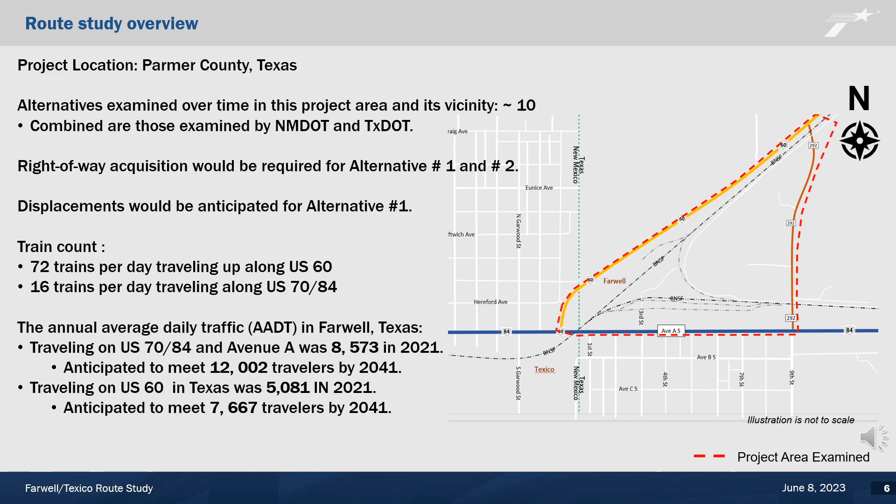Presented on this slide are the purpose and need. The need for alternative number 1 and number 2 includes improving safety of travelers on US 60, 70, 84 in Parmer County, Texas, reducing potential for vehicle versus train incidents at the existing railroad crossings, providing ADA ramps and sidewalk facilities to meet pedestrian traffic needs along US 60, 70, 84, providing wider shoulders on FM 292 for farming equipment traveling between properties, providing enhanced traffic routes to increase mobility for emergency vehicles and first responders, and providing the traveling public with enhanced traffic routes during train delays at the existing crossings.

The purpose of the route study is to identify route options that would reduce or eliminate travel delays at the existing railroad crossings in Parmer County, Texas.

Identify if a route presented should be advanced for further design and environmental study, engage stakeholders and the general public to gain feedback and input, and assess the impacts either alternative would have on the communities of Farwell, Texas, and Texico, New Mexico. The purpose of the public meeting is to inform the public of the status of the route study.

To present proposed alternatives and determine the potential to affect lives and property, to develop a record of public views and opinions to accompany recommendations for a feasible traffic route to span one of the existing crossings in Parmer County, Texas.

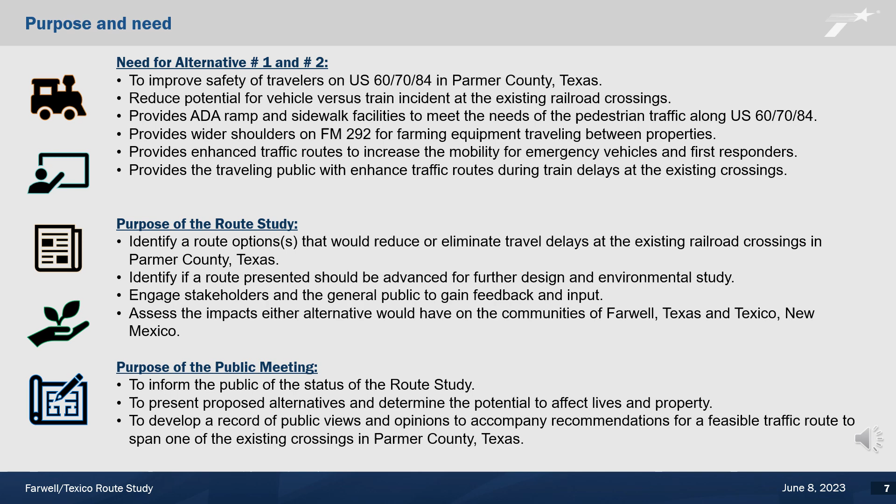Let's review alternative number 1, referred to as the US 60, 70, 84 Railroad Bridge. This alternative design would require construction in both Texas and New Mexico.

In this slide, the schematic for alternative number 1 is being displayed. Alternative number 1, referred to as the US 60, 70, 84 Railroad Bridge, would span from FM 292 in Farwell, Texas to College Street in Texico, New Mexico. Depicted in red is the proposed frontage roads. In blue are the proposed main lanes, and in yellow is the bridge structure spanning the existing BNSF railroad.

Construction would require right-of-way acquisition and displacements on the north side of US 70, 84, also known as Avenue A, within Farwell, Texas. It would also require right-of-way acquisition and displacements on the south side of US 60, 70, 84, also known as Wheeler Avenue, within Texico, New Mexico.

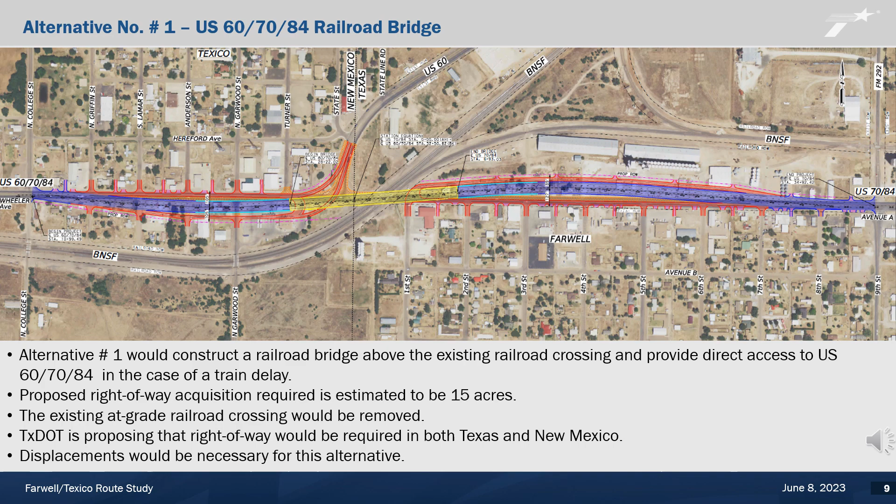The proposal of alternative number 1 is to construct a grade-separated bridge above the existing railroad crossing and provide direct access to US 60, 70, 84 in the case of a train delay. Proposed right-of-way required is estimated to be approximately 15 acres. The construction of the bridge would mean that the existing railroad crossing will be removed, and no access will be available across state lines below the bridge.

Shown here in the illustration is the proposed typical section of the US 60, 70, 84 railroad bridge. A typical section is a cross-section of the road designed to provide the public with a visual representation of how it may look. The illustration is not to scale and is simply for visual representation.

The illustration on your screen shows the proposed bridge structure in the air spanning over the existing BNSF railroad. At its crest, the bridge height will be approximately 23 feet. The bridge structure will be composed of 2 travel lanes in each direction with a width of 12 feet each, divided by a central barrier, with the design also including 10-foot wide outside shoulders.

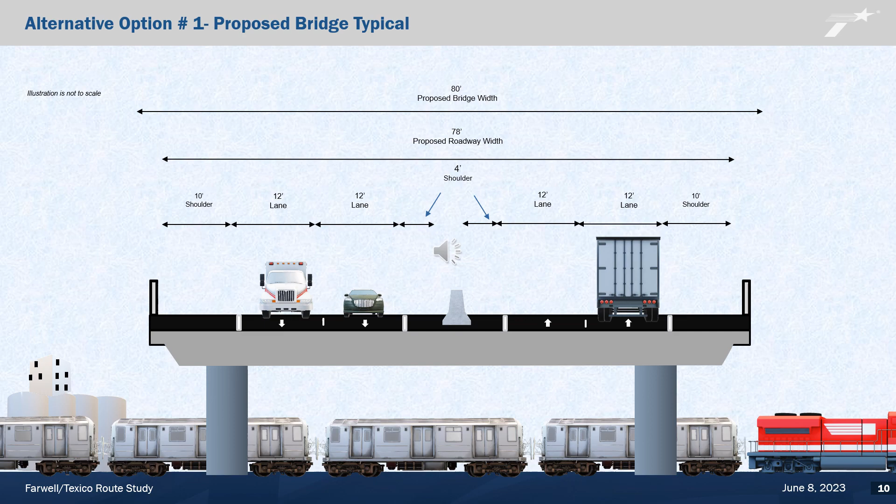Shown here in the illustration is the proposed typical section of the frontage roads along US 60, 70, 84. This illustration is not to scale and is simply for a visual representation.

Alternative number 1 will not only have a bridge structure spanning the existing railroad, but also have one-way frontage roads. The frontage road will have a 12-foot wide travel lane and a 10-foot wide outside shoulder.

Proposed with the construction of the frontage road is the installation of a 6-foot wide sidewalk within the proposed border width. The existing railroad crossing will be removed, and access through US 60, 70, 84 from New Mexico and Texas will only occur through travel of the proposed bridge structure.

The frontage road in Texas will function as a U-turn, as it travels under the bridge structure to access south of US 60, 70, 84 in Farwell, Texas.

In New Mexico, the eastbound frontage road will connect into the existing US 60 intersection under the bridge structure. The westbound US 60 travel lane will tie into the new frontage road in New Mexico to provide a continuous flow.

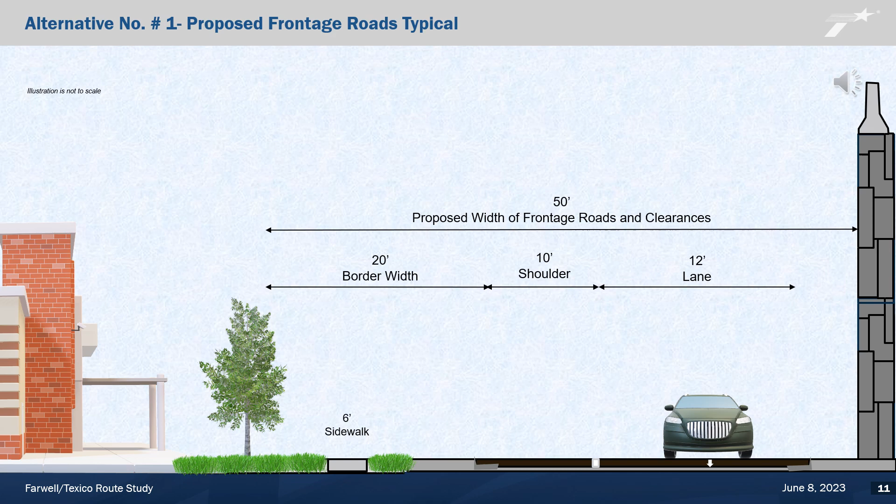Let's review alternative number 2, referred to as the US 60 and FM 292 train bypass route. This alternative design would require construction, but only in Texas.

On this slide, the schematic for alternative number 2 is being displayed. Alternative number 2, referred to as the US 60 and FM 292 train bypass route, would be constructed just outside of Farwell, Texas. This schematic illustrates that the proposed bridge structure would span over the existing railroad, BNSF Railroad,

and US 60 eastbound. Depicted in the color green is the left-hand entrance and exit ramps to provide access to the elevated intersection, on US 60, in the existing median.

Depicted in blue is the proposed main lanes of FM 292, and in yellow is the bridge structure. Construction would require right-of-way acquisition south of Railroad Road.

Alternative number 2 would construct a train bypass that spans over the existing railroad crossing and provides direct access to US 60 and FM 292 in the case of a train delay. Proposed right-of-way acquisition is currently estimated to be 23 acres.

The construction of this bridge would mean that the existing railroad crossing would be removed, but access to Railroad Road will remain available. TxDOT would propose to place a drainage pond between Railroad Road and the FM 292 main lanes. There would be no direct impacts to the Sunrise Terrace Cemetery north of US 60.

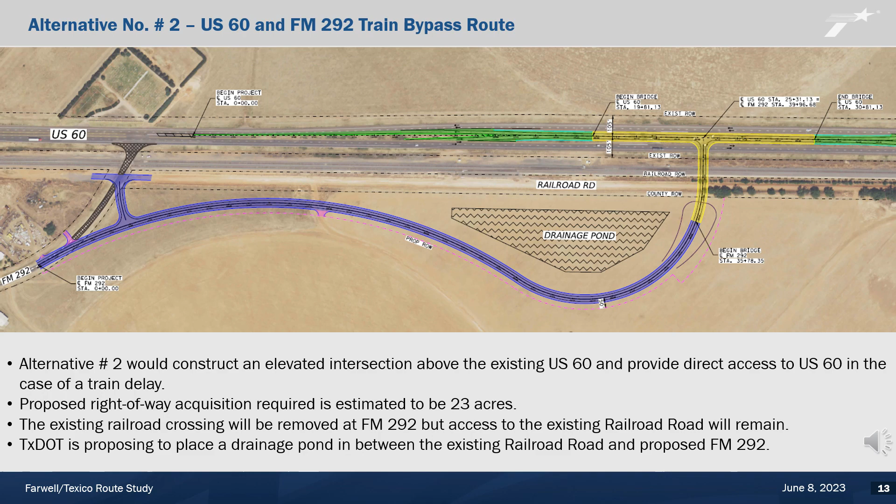Shown here in the illustration is the proposed typical section of the elevated intersection on US 60. As previously mentioned, this is an illustration and not drawn to scale.

Alternative number 2 would eliminate the existing FM 292 and US 60 railroad crossing and replace it with an elevated intersection to access the existing US 60.

There is a proposal of left-hand entrance and exit ramps in the existing medians that will allow access to the elevated intersection. The elevated intersection will have 2 lanes, 12 feet wide in each direction, and have 9-foot wide outside shoulders.

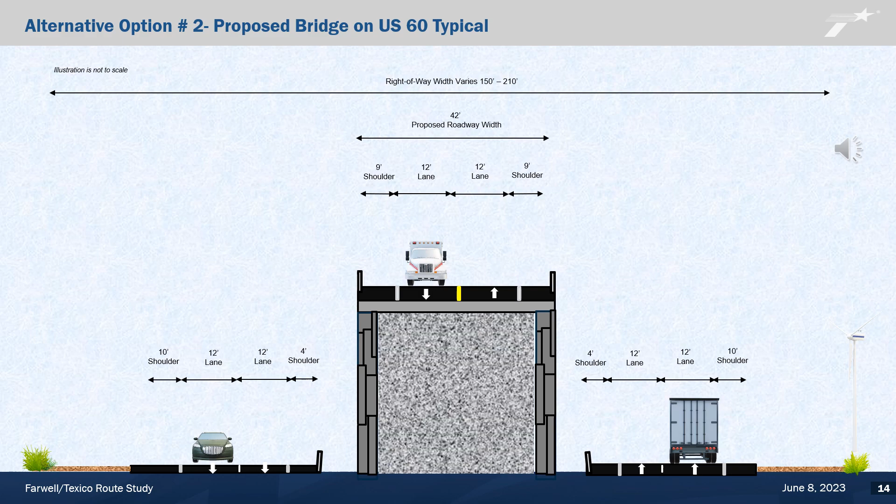Alternative number 2 contains an elevated intersection spanning the BNSF Railroad in Farwell, Texas. Shown here in the illustration is the proposed typical section of the FM 292 main lanes approaching the intersection. As previously mentioned, this is an illustration and not drawn to scale.

On FM 292, approaching from US 60, 70, 84, the existing travel lanes would be widened from 10 feet wide to 12 feet wide, with 1 travel lane in each direction. There would also be 10-foot wide outside shoulders.

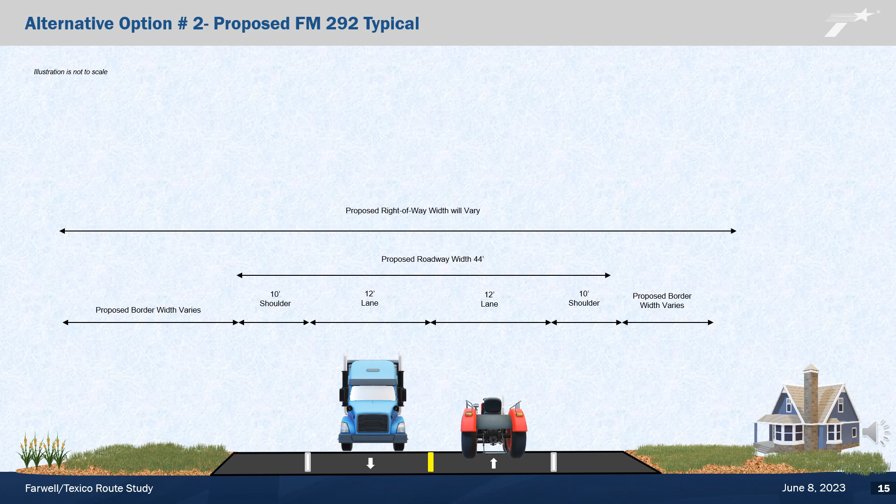Following the closure of the comment period, TxDOT Lubbock District will meet with the New Mexico Department of Transportation to review the feedback and comments received. With conclusion of review, TxDOT will assemble the route study and decide on the next steps.

Following the route study is the environmental study phase. To move forward to this phase, a feasible alternative would need to be approved and funding would need to be secured. Anticipation to begin this phase is dependent on the results of the route study, which will be available to view in the fall of 2023.

The environmental study phase is estimated to be completed in 24 months. Results from the environmental study for the selected alternative will be required to move forward. The next project phase would involve right-of-way acquisition, utility relocation, and final design.

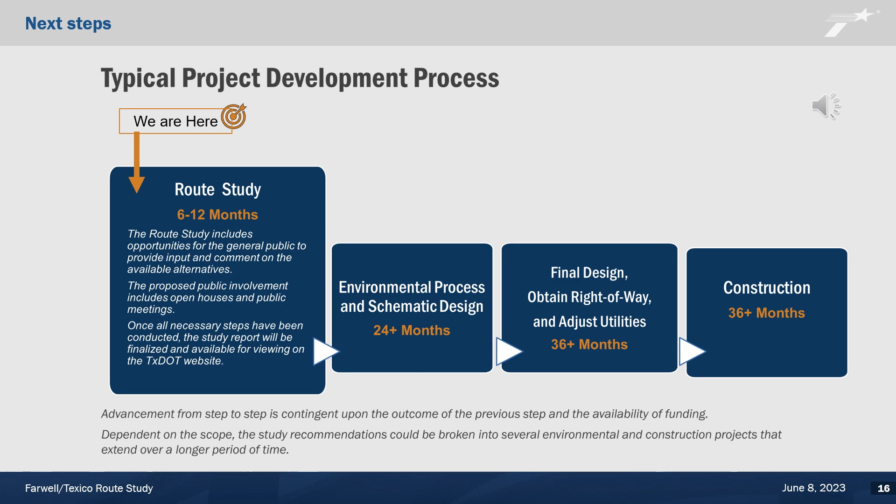The combined project development phases could take anywhere from 8 to 12 years, which is all dependent on the availability of funding and agreements with primary stakeholders, such as the neighboring transportation agencies, as well as the railroad service providers.

Results from the route study are anticipated to be on the TxDOT website and project page by fall of 2023. At that point, if an alternative presented has been chosen, we would then begin evaluating the environmental constraints for project feasibility. If no alternative is chosen from those presented, or if the public has provided us with input of a different design, the study process may continue further depending on funding and design feasibility.

The environmental evaluation of potential impacts by the proposed project to the natural and human environment includes but is not limited to biological resources, cultural resources, hazardous materials, historical resources, traffic noise, and community impacts.

The environmental constraints for both the town of Farwell, Texas and Texico, New Mexico have been monitored and documented on a preliminary environmental constraint map, which is available at the project meeting page with the rest of the public meeting documentation.

Your comments are very important to the Texas and New Mexico Department of Transportation and will contribute greatly to the success of this study. Comments and feedback may be provided at one of the available in-person open houses. Comments may also be made throughout the comment period and will be included in the public meeting summary documentation.